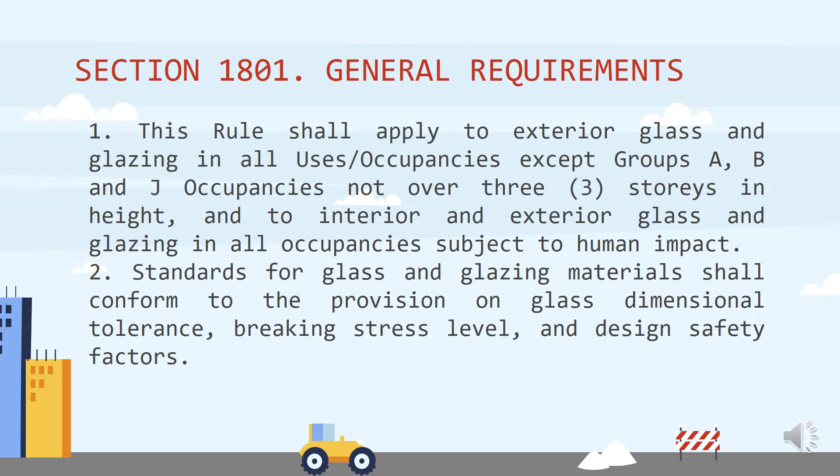Number 2. The standards for glass and glazing materials shall conform to the provision on glass dimensional tolerance, breaking stress level, and design safety factors. 3. Each light or glass panel shall bear the manufacturer's label designating the type and thickness of glass.

Number 4. Each light with special performance characteristics such as laminated, heat strengthened, fully tempered or insulated shall bear the manufacturer's identification showing the special characteristics and thickness by etching or other permanent identification that shall be visible after the glass is glazed.

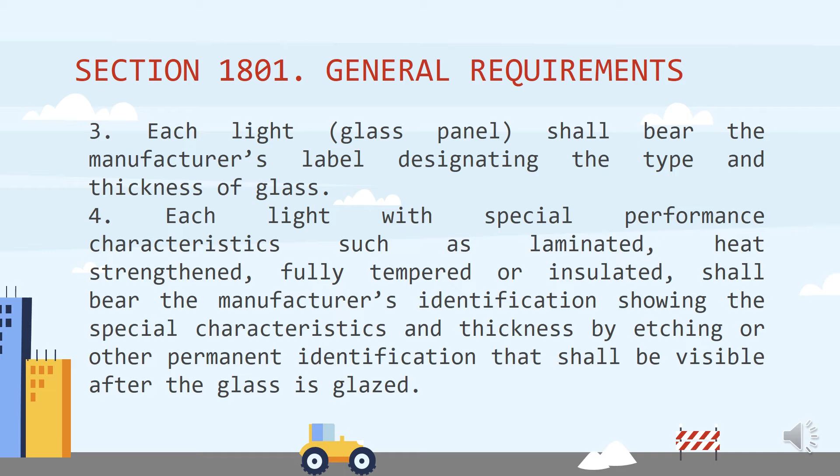Number 5. Appropriate measures shall be provided to deter persons walking into fixed glass panels where the floor contiguous thereto on both sides is approximately the same level. Number 6. The glass panels not adjacent to wall openings may be made obvious by horizontal bars at guardrail height, a 450 mm opaque bulkhead, distinctive glass such as etched or translucent for guardrail height, fixed flower bins, or other appropriate construction arrangement.

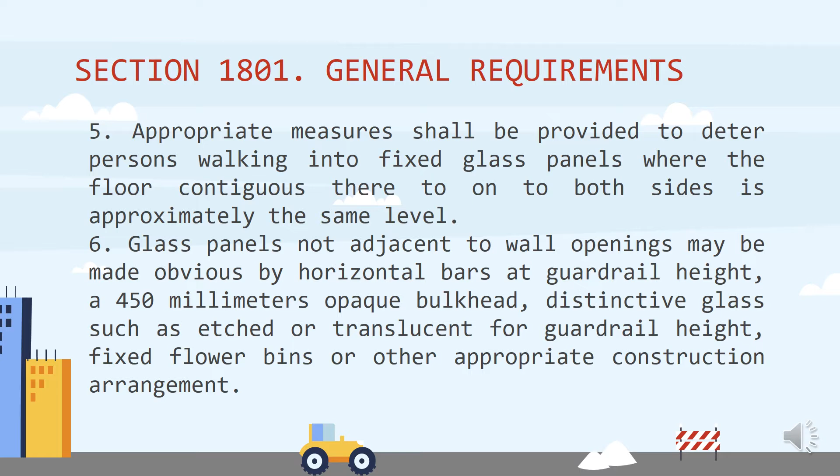Under Section 1802 is the area limitation. First, the exterior glass and glazing shall be capable of safely withstanding the load due to wind pressure for various height zones above ground acting inward or outward. The area of individual light shall not be more than the maximum allowable area of glass according to the wind load multiplied by the appropriate adjustment factor.

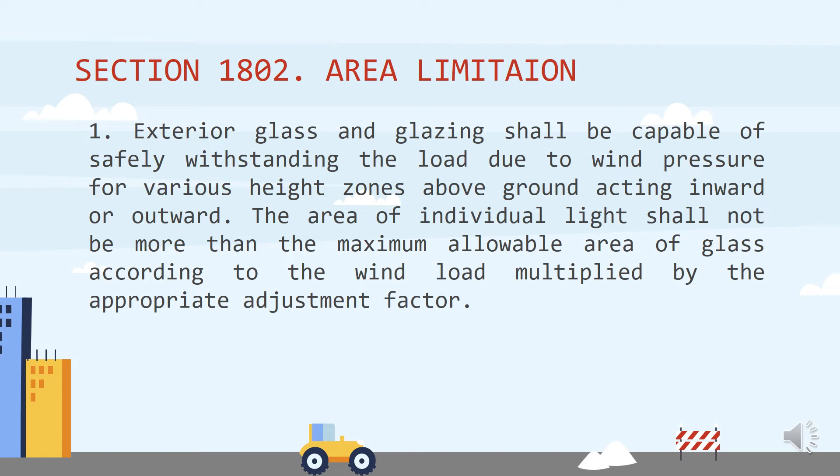Number 2. Glass panels which are more than 600 mm in width and 180 mm or more in height adjacent to wall opening shall be safety glass unless a bulkhead of opaque materials not less than 450 mm high is provided.

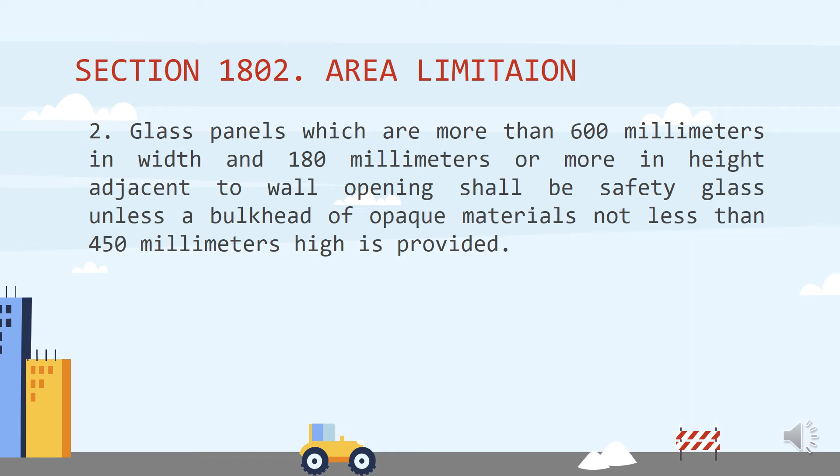Number 3. The table provided below shall govern the glass area limitation for use in large areas along shopping malls, commercial buildings, theaters, offices, institutional public buildings, and factories other than Group A, B, and J occupancies. For a glass with a thickness of 8 mm, the width should be 1.10 meters and below, and the length should be 1.10 meters and below also.

For the thickness of 10 mm, the width must be 2.25 meters and below, and the length is 2.25 meters and below. With a thickness of 12 mm, the width must be 3 meters and below, and the length must be 3 meters and below also. And for the thickness of 15 mm, the width must be over 3 meters, including the length.

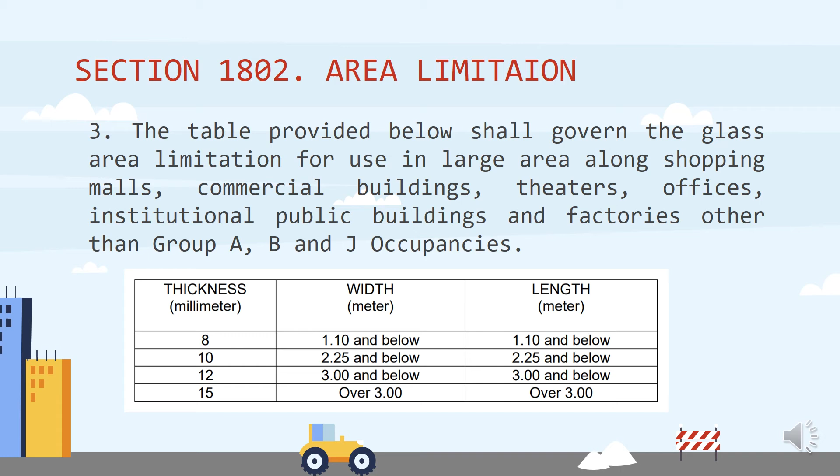Section 1803, Glazing. Glass firmly supported on all four edges shall be glazed with minimum laps and edge clearances in accordance with Section 1801, Paragraph 2, provided that glass edge clearance in fixed openings shall be not less than what is required for wind and earthquake drift. For glass not firmly supported on all four edges, the design shall be submitted for approval of the building official. Glass support shall be considered firm when deflection of the support at design loads does not exceed 1/175 of the span.

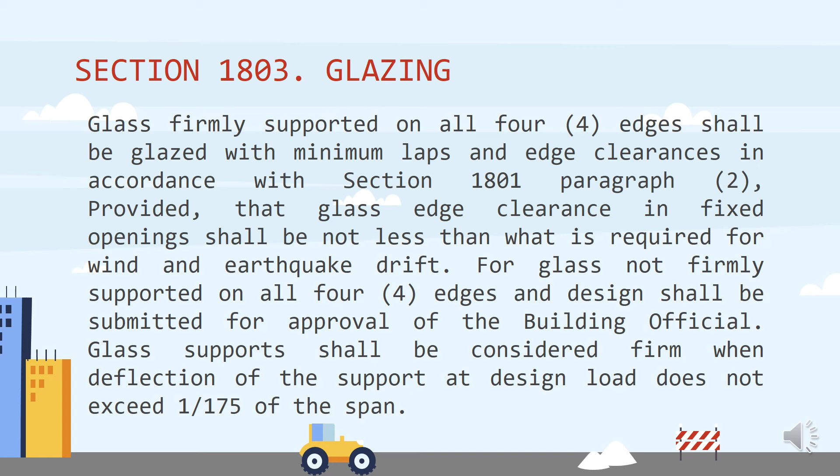Section 1804, Louvered Windows. Regular plate, sheet, or patterned glass in jalousies and louvered windows shall not be thinner than 5.6 millimeters minimum and shall not be longer than 1.20 meters. Exposed glass edges shall be smooth.

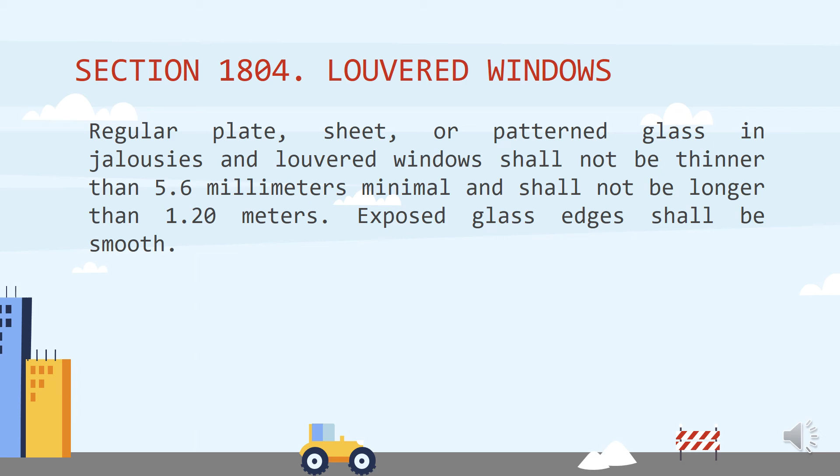Section 1805, Impact. Frameless glass doors, glass in doors, fixed glass panels, and similar glazed openings, which may be subject to accidental human impact, shall conform with the requirements provided under Section 1802 on impact loads of glass, except in the following cases.

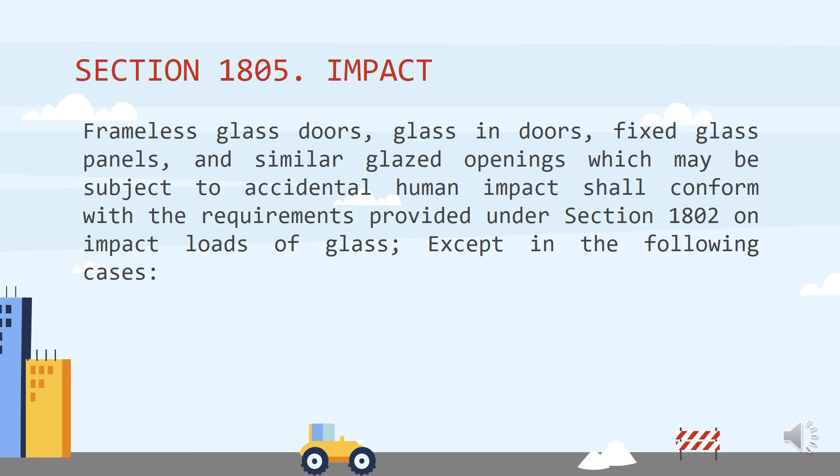1. Bathtub and shower enclosures shall be constructed from approved shatter-resistant materials, such as wire-reinforced glass not less than 5.6 millimeters thick, fully tempered glass not less than 4.8 millimeters thick, or laminated safety glass not less than 6.4 millimeters thick.

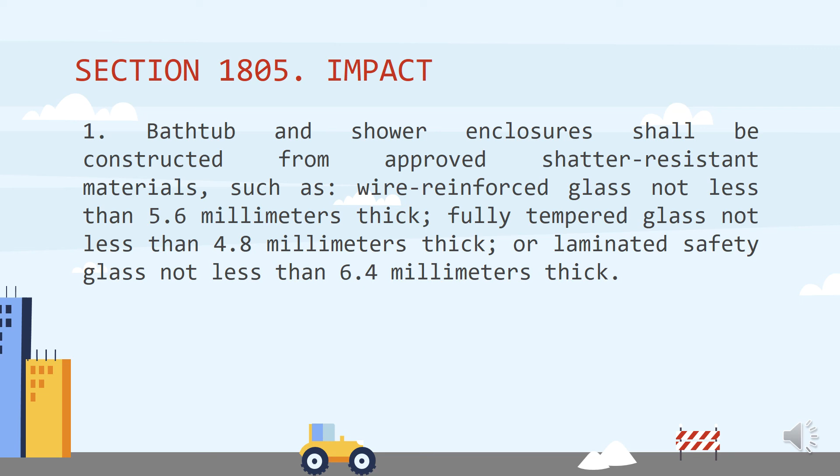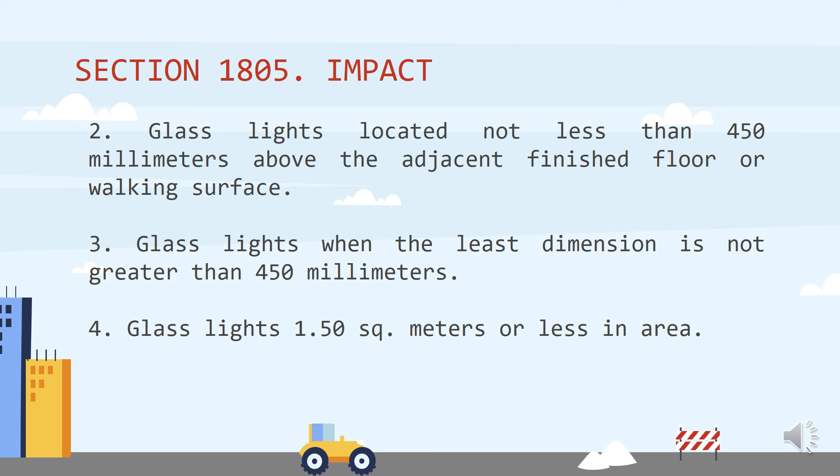Number 2. Glass lights located not less than 450 millimeters above the adjacent finished floor or walking surface. 3. Glass lights when the least dimension is not greater than 450 millimeters. Glass lights 1.50 square meters or less in area.